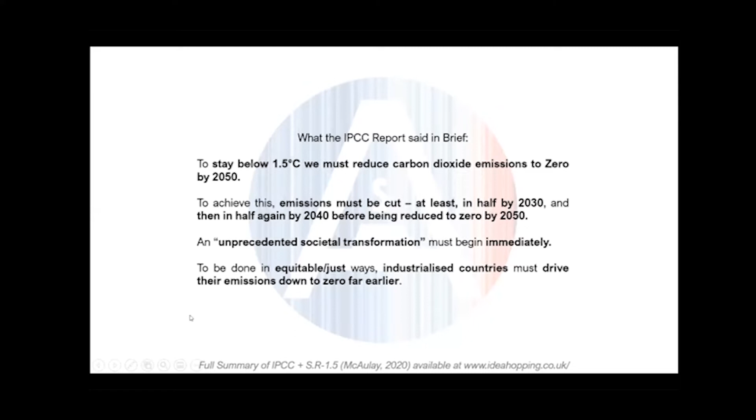This is the report that really jolted people into action 2 years ago, that '12 years to save the world' sort of rhetoric. To explain what it said: if we want to stay below 1.5 degrees above pre-industrial levels, carbon dioxide emissions have to hit zero by 2050. That's non-negotiable. Achieving this means emissions have to be cut in half in a decade, in half again the next decade, and zero by 2050. But to do this we need to really transform society. It's not just a slight tweak or bolt-on here and there, it's absolute transformation. And if this has to be done equitably and justly, industrialized countries must drive down their emissions far faster as well.

So what does this mean for buildings? The report was very clear about what that means for the construction industry and how buildings operate. For 1.5 degree pathways that keep us below that threshold, building emissions have to be reduced by 80 to 90% by 2050. That is huge. On top of that, we were told that by last year, all new construction needs to be fossil-free and near zero energy. And we need an increased rate of retrofit of at least 5% per year, year on year. This came from the Committee on Climate Change in the UK 2 years ago.

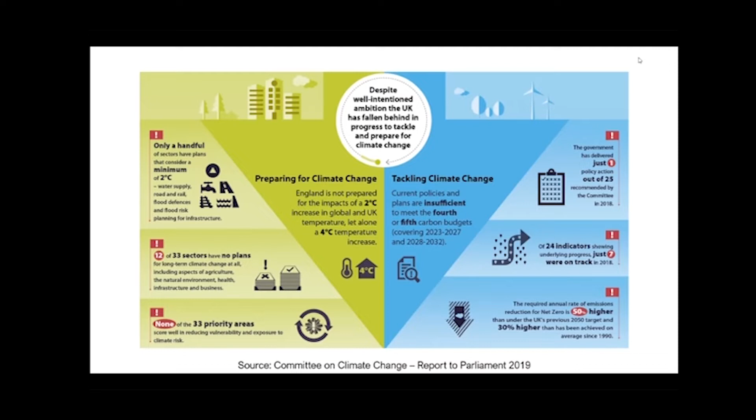This was a scorecard put together to show how things were progressing. 2 years ago, 12 out of 33 sectors in the UK had no plan for long-term climate change. We just had a report a few days ago saying the gap between the adaptation necessary and what is happening is actually widening. So we're further behind than we were 2 years ago at this point. The Committee on Climate Change was also very clear that we cannot meet the legally binding net zero by 2050 target if we don't nearly completely eliminate greenhouse gas emissions from UK buildings.

So the construction sector is incredibly important when it comes to responding to climate change, it has such a big impact. But in positive news, 2/3 of people surveyed said that climate change is a global emergency. In the UK, it's actually 81%. So we've got this huge increase of attention on the topic.

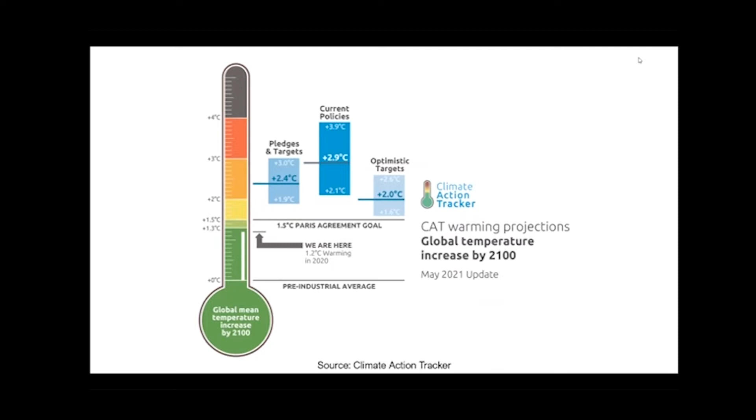Just to show whereabouts we are in relation to that 1.5 degree threshold, we are currently about 1.2 degrees. So we've got a really slim bit to play with. But it is possible within the laws of chemistry and physics. So it is possible to get there.

So you might wonder, as everyone does, how big a difference does that half a degree between 1.5 and 2 degrees actually make? Because on paper it doesn't sound like much, but in reality it's a huge exponential increase. If you look at extreme heat and how people are affected by that around the world, between 1.5 and 2 degrees it's over 2.5 times worse for people being affected by severe heat at least once every 5 years. And as far as sea level rise goes, that's another 6 centimeters from 1.5 to 2 degrees. So if you think of how many people in the world live in coastal areas, that has a huge impact upon life of all sorts as well.

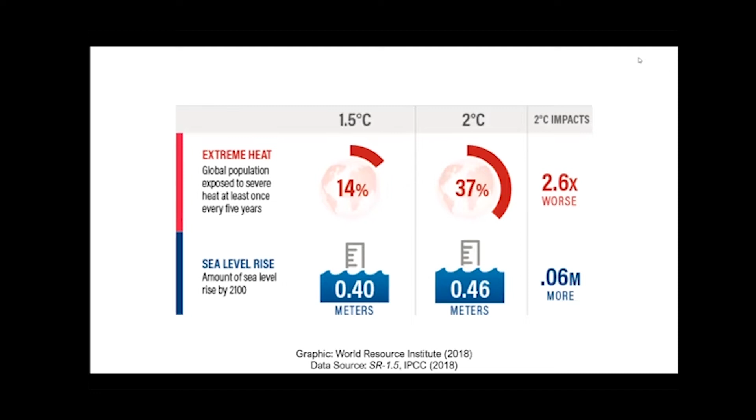But we recently had the Scotland's Climate Assembly. This is a really interesting thing that shows what the public think is necessary. This was the first ever Citizens' Assembly in Scotland, and their question was: how should Scotland tackle climate change, to tackle the climate emergency, in an effective and fair way? So all these things they're calling for, they've been given all the information, they've been given consultancy to learn about this, and they've responded.

So when you give the public the information, 97% of them say building quality must be improved. This is just a wee bit of market research that shows everybody wants this. 97% of people agree this is necessary. When it comes to passive house standards for new build, 97% of that assembly said it's necessary. 97% said planning should consider climate. As far as non-residential building, everything's increased. There's a huge demand for this.

And then when it comes to retrofitting homes, 94% of the Assembly said that Scotland should try to establish itself as a world leader in this practice. So there's a huge appetite and ambition in this part. One of the most amazing things that came out of this was the Assembly recommended the Scottish Government retrofit all existing homes by 2030. That is a radical, huge, ambitious thing. But in terms of creating work and stable green jobs, that could be revolutionary in itself. So that's just a little bit to show what's been coming out of that assembly.

And from around climate change, there's been lots of different narratives. There's ones like David Attenborough's, where it just says don't waste - as long as you don't waste things, things can be the same. But that actively overlooks the whole huge systemic changes that we really need to be seeing. We see it in cinema, we see it in documentaries - when things become very visual, they get a very strong response. Lots of people might have started to look at their plastic use after someone recommended they watch A Plastic Ocean or Blue Planet 2, because they offer a bit of a personal solution or a quick fix. They're quite good at stirring responses, but again, they don't look at the full wicked problem.

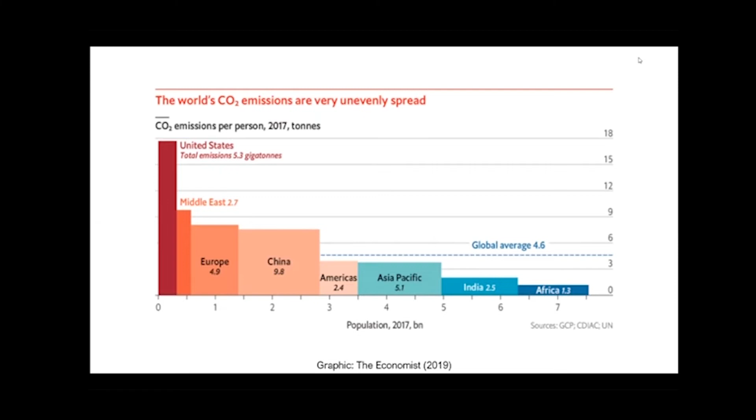And when you look at the world's CO2 emissions, they're very unevenly spread. In the UK, we emit a huge amount over the global average of 4.6 tonnes. In the United States, on the left-hand side of this graph, it's huge again on top of that. But actually, the UK is not as vulnerable to climate change in comparison to its neighbours. Also, the countries that have been doing the least emitting, typically in the global south, are far more vulnerable than we are. We're insulated at the moment due to our geography. But as you can see, even today, with the heat dome above Canada and America, they are already feeling the effects of this quite drastically as well.

Just to talk about greenwashing, to tie that line in and make that link - this is when a company makes a product, a service, or a building out to be more green than it actually is, usually without giving data to really explain this. Some examples might be claims about products or projects that aren't backed up. Other examples in the built environment are just throwing renewables at unsustainable design, because without addressing the fabric of a building, we're overlooking lots of the problems. Another is just throwing lots of technology at unsustainable design. So if we're starting from a point where our building regulations are not enough, simply throwing technology at buildings operating at the same performance isn't really going to fix the problem.

But quite a recent one, particularly in architectural spaces, is just throwing greenery quite literally at buildings or on top of them. This is the Bosco Verticale, which lots of people might think is the typical look of green architecture. In its context, it works, but it's not a universal fit.

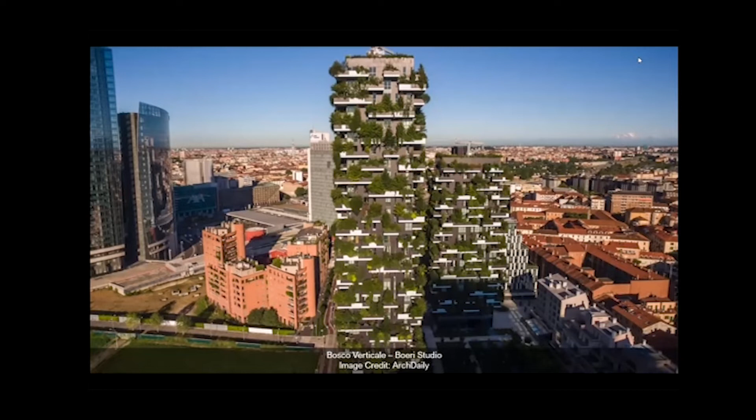And when you consider things like embodied carbon to put trees where they don't last their full lifespan, that raises questions as well. So now we're just going to do a really quick jump through the science, just enough to understand some of these reports that are coming out, because they are quite jargon heavy.

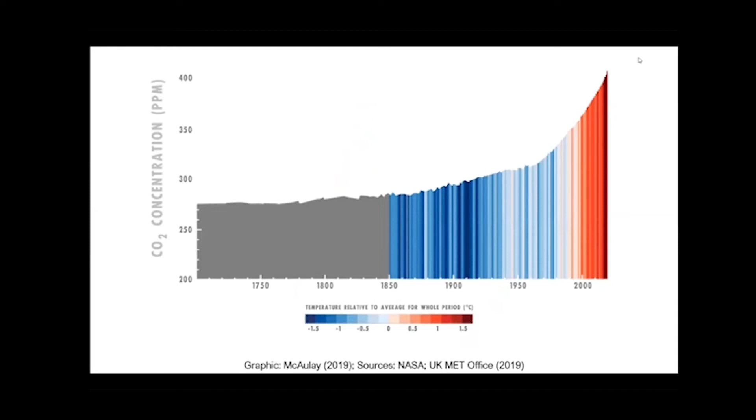You can see in this graphic here, on the left-hand side you've got the amount of carbon dioxide in the Earth's air, and in the colours you can see how much hotter the planet's actually getting. As we cross that 350 parts per million threshold of safety, as scientists call it, we've had a big spike in temperature, and that's been really consistent. Actually 2020 tied for the hottest year on record along with 2016.

So this is not the start of a new normal, this is the start of a rising baseline of how hot things can actually get.

We then have Earth Overshoot Day, where since the 1970s, we've been using more resources than our Earth can actually regenerate. At the moment, we use the equivalent of 1.6 Earths, and Earth Overshoot Day comes in about August or July. On that day, we surpass what the planet can sustain on an annual basis.

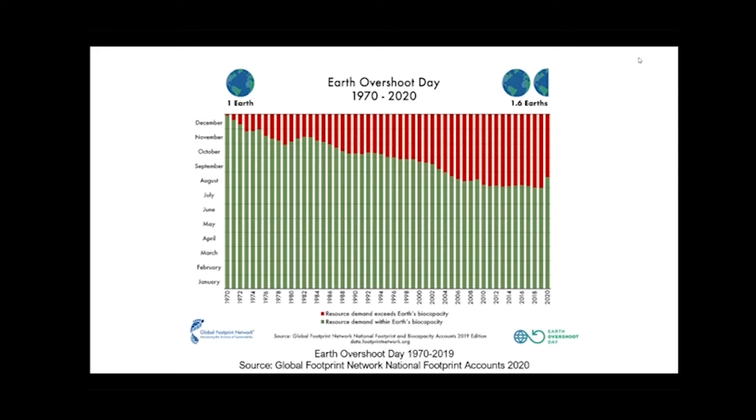And just to link all that in, there have been lots of planetary tipping points that have been identified, and these are starting to arrive quite far sooner than predicted. Things like the Greenland ice sheet were not predicted to start melting till 2100. That's starting now. So we've got things happening faster than previously expected.

So we're now going to pull it back to the built environment, because the built environment has a huge impact, but at the same time that impact could be an opportunity for doing climate good as well. So we'll go through some of this.

The operational energy in the built environment is 28% of global carbon emissions, which is absolutely huge. But on top of that, the embodied carbon of our built environment is another 11%. That's where you get that 40% figure from - the construction industry accounts for around 40% of all the carbon we emit globally, which is absolutely huge.

And there's never been a massive NGO campaign purely focused on the built environment. So we've had a bit of an oversight in that regard.

As far as embodied carbon goes, since that might be a new term for some of us, this is the carbon dioxide you emit during the extraction of material, the manufacture, transport, and construction of the building material, taking into account its lifespan from cradle - so from the ground to grave, as in back into the ground - or cradle to cradle, to be continuously recycled.

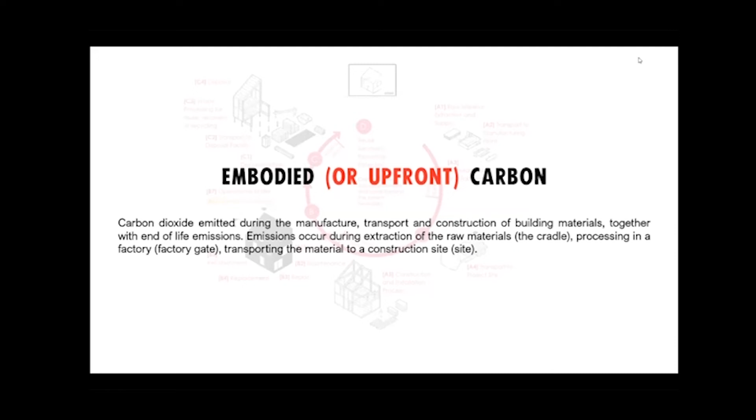But just to talk about that, at different points in the building's lifespan you get carbon being emitted - everything from the building itself to maintenance to transport. Because at the moment we currently say buildings that last 65 years have a long life, which in terms of responding to a climate emergency, we need to be building buildings that last, buildings that go beyond 100, 200 years at this point.

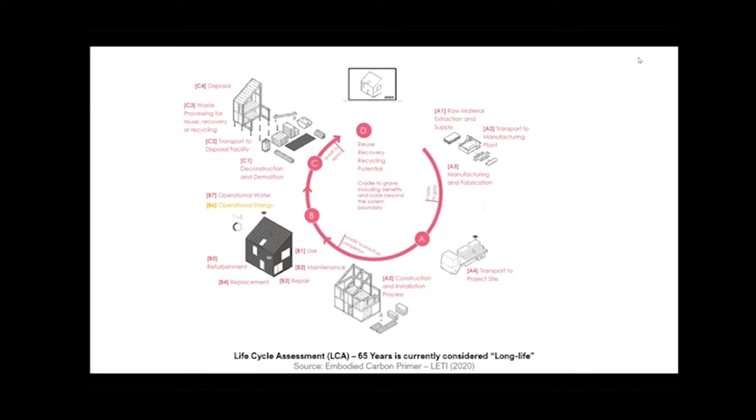Because cement production is responsible for 8 to 9% of global carbon emissions. This is a huge contributing factor, larger than several countries' total emissions.

And less than 3% of all the things we talk about around climate change mention the energy efficiency of buildings. So there's this 28% figure, which is a huge thing we can actually reduce and start working on.

But in the UK, a survey last year showed that 64% of the UK public had never heard of the concept of net zero before. So to lots of us that's a common, very familiar term, but when we're talking to the public and clients, this might not be something they've heard about. So this is a very useful thing to spot check and see how we're getting on at communicating that to the public.

Because buildings can actually be up to 250% worse than as designed. And this is a performance gap that we're starting to really try and dig into and eliminate, because it's a huge waste of energy and resources as well.

Retrofit is one of the key things in responding to the climate emergency through the built environment. 80% of the buildings we'll be using in 2050 are already standing right now, and you can save 55 to 75% of the associated embodied carbon by retrofitting a building instead of wiping it out and starting afresh.

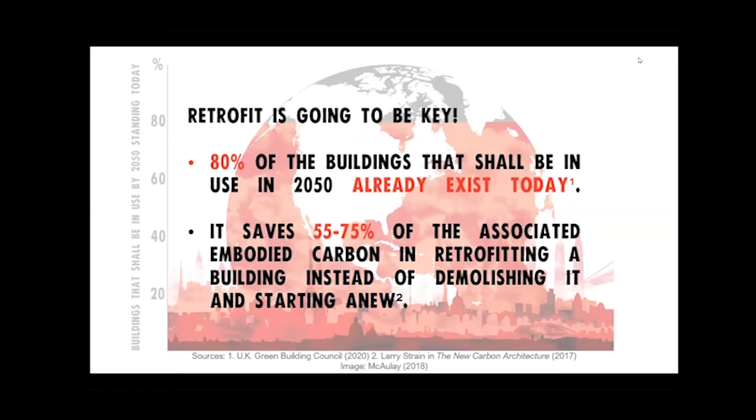From the Scaling Up Retrofit report, we were told quite bluntly that if the UK wants to meet its Paris climate commitments, it must be retrofitting 1,000 homes every single day. At the moment, that's not quite happening. But again, that's huge potential for generating work, generating stable green jobs, and driving down carbon emissions at the same time.

On top of that, 40% of any nation's healthcare costs actually come from its built environment. This relates to things like asthma, fuel poverty, respiratory conditions, and other things. So healthy and sustainable buildings are actually a public health strategy. It's not just about climate, it's also about our health and well-being.

So what can we actually do in that space? We're actually very lucky, lots of things already exist. We already have things like CEDA's Sustainable Renovation Guide, which teaches us about improving homes for energy, health, and the environment. And there's guidance from Historic Environment Scotland on working with traditional buildings. So we can use them straight out the box. They already exist, and it's fantastic.

But we also have definitions of what net zero operational carbon actually is. How does it work? This is about looking at low energy use, the measurement and verification of buildings, reducing construction impacts, low carbon energy, and then looking at that zero carbon balance. This is something we can bring into all of the work that we do.

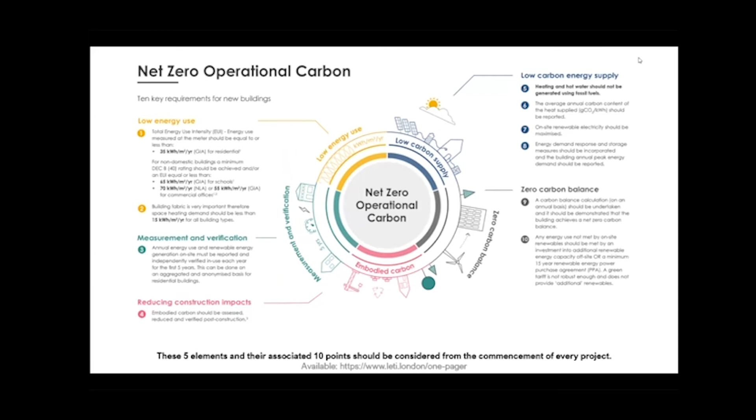So just some quick things to remember: prioritize the adaptation, retrofit, and reuse of buildings over building new ones. Everything we work on is an intervention into an existing ecosystem - something was there before people built houses there. Statistics say 90% of a building's environmental impact comes from the very earliest design decisions - where that building is, where windows go, orientation, etc. So always strive for solutions over demolition.

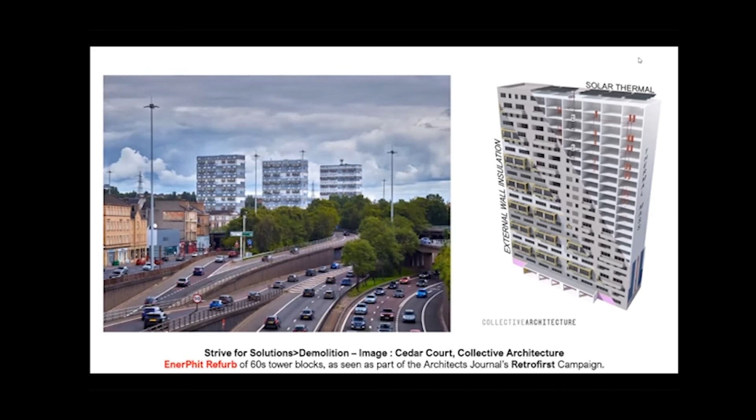A really fantastic example by Collective Architecture is an EnerPhit refurb of a 60s tower block. It was a really incredible way of taking buildings that the residents actually loved quite dearly and making them as efficient as physically possible.

Conservation is also incredibly important - the traditional buildings we have to work with, because lots of these traditional building skills are actually lower carbon than modern equivalents, and they're quite sustainable. Things like limecrete, lime plastering, clay plastering, etc. This is an example of a conservation project, what is now the Centre for Conservation training in Scotland - the Engine Shed from Historic Environment Scotland.

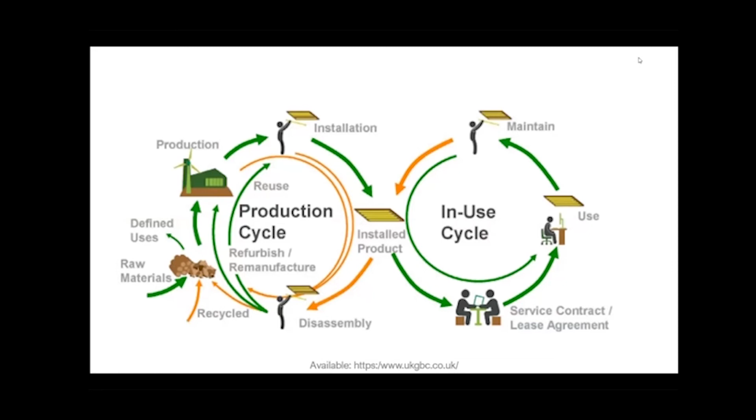If reuse is not an option, we need to design for circularity - to keep materials and components in circulation, to reuse them. In Northwest Europe, only 1% of building materials or elements are reused following their first use, when realistically they should be able to go on and on. So the whole circular economy is not just a buzzword, it's about keeping materials in flows and cycles - looking at an installed product in terms of leases, maintaining it, and with disassembly, reuse beyond just the installation.

A good example of this is the Bute Recycling Centre, also by Collective Architecture, which used many reclaimed and recycled materials.

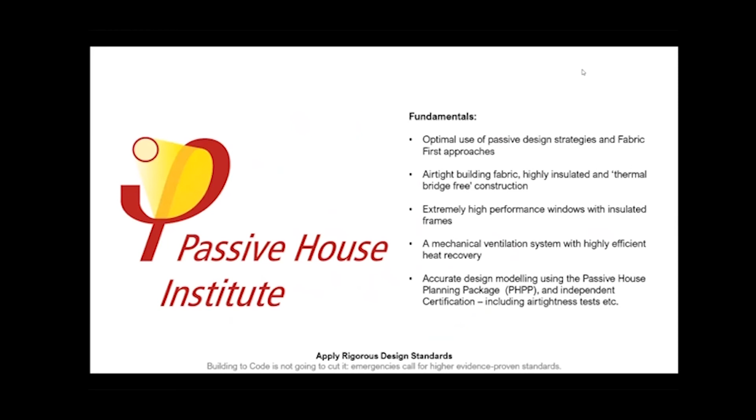On top of that, we need to be increasing the standards we're using. Building to code or the barest legal minimum is not really fit for an emergency - we need to go beyond the minimum bar. Passive House is a really good way to start doing this, a really thorough method. The fundamentals of Passive House are optimal use of passive design strategies, an airtight building fabric with continuous insulation and thermal bridge-free construction, really high performance components, MVHR systems, and modeled and verified design - going well beyond the bare minimum.

Typically in a UK context, passive houses achieve a 75% reduction in space heating requirements as opposed to standard buildings. That's a huge improvement in reducing fuel costs and building better buildings.

An example you might be quite familiar with is Goldsmith Street by Mikhail Riches - it actually won the RIBA Stirling Prize.

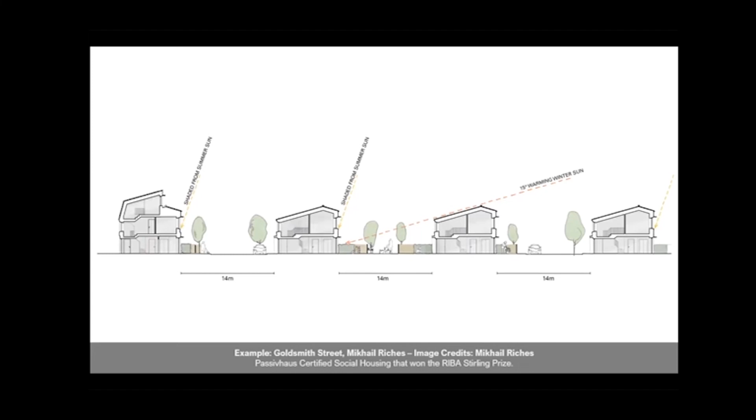So for the first time, a social housing and passive house project won that prize, which really changed the game in that regard. It's been designed fabric first to try and drive down fuel cost as much as possible, and have a really lovely place to live as well.

But this does bring in more complexity. For building details, the amount of insulation that you can see here in red has been beefed up quite substantially as well. So what does that mean on site for a passive house?

Really, it means there's a far greater emphasis on build quality above all else and attention to detail - how airtight buildings are, the continuity of insulation wrapping with no gaps, greater collaboration and more open communication channels, how you sequence the build, and thermal breaks in particular.

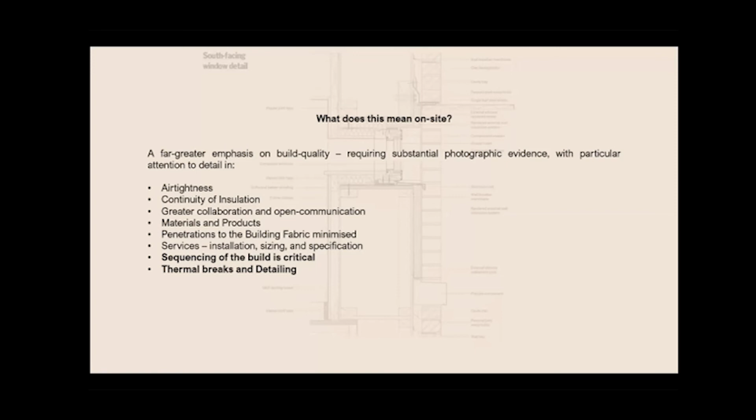In Scotland, passive house buildings are starting to get more common. We can now start to find any of these through the Passive House Trust website if you want to go and look. Other examples include Lilac in Leeds from White Design.

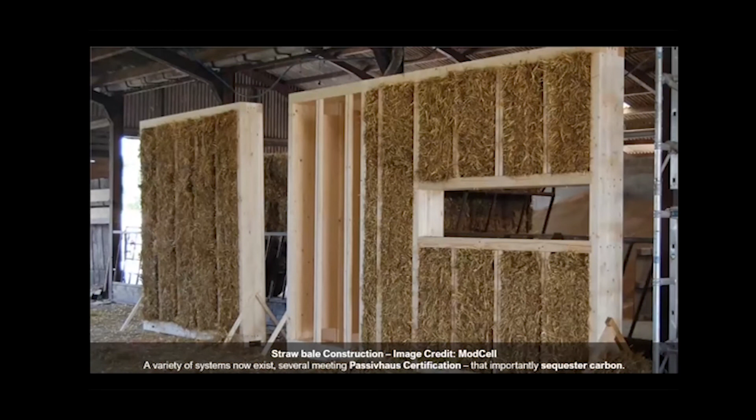This is a low impact co-housing scheme that was actually prefabricated using a straw bale panel system. You can't really tell from here, but this is what that looks like. Lots of these systems are actually passive house certified, meaning they can meet passive house standards straight away. But really importantly, they sequester a huge amount of carbon dioxide.

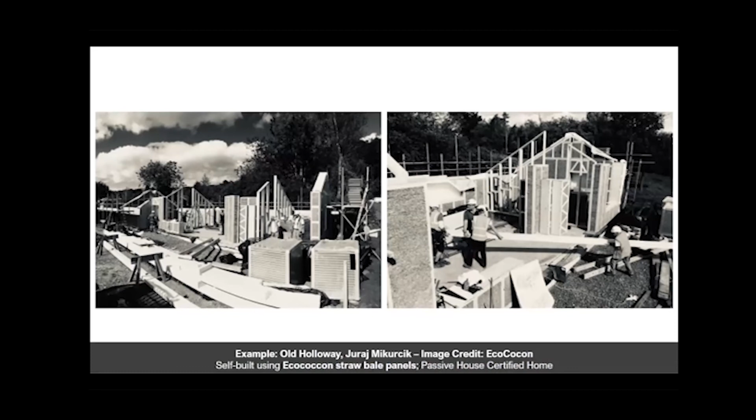Another example is a lovely house at Old Holloway by Juraj Mikurcik, who's from Architype. This is a self-built home, proving you can build to passive house standards with self-builders as well. It's a really lovely project where you can see these panels came in as different components and slotted together like Lego blocks, which made for a very quick and succinct build.

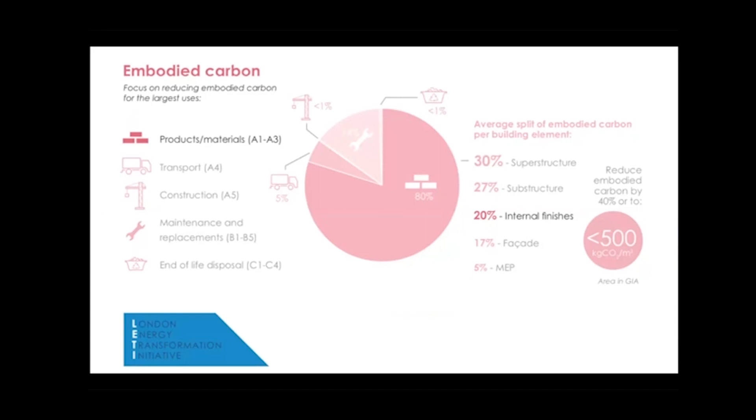But on the embodied carbon front, we do need to note that internal finishes are very important - even how we paint, plaster, and build up from plasterboard. Alternatives to gypsum are things like clay, because clay can be lower impact and healthier, and it can also give you a bit of moisture buffering and some thermal mass on top as well.

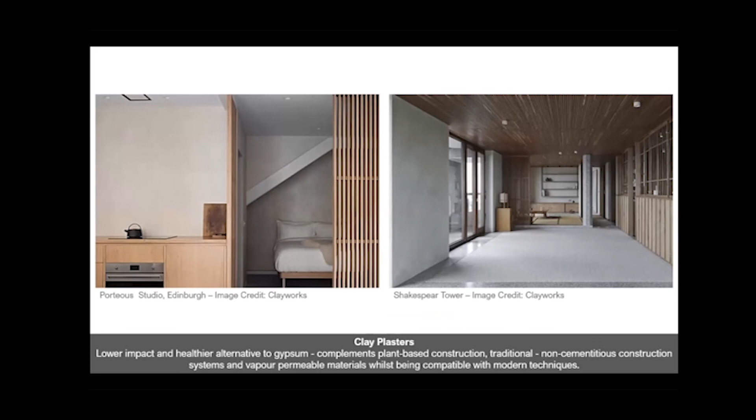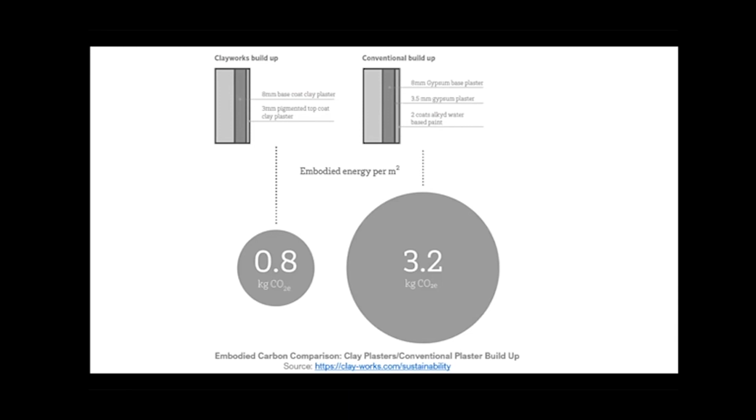So it's very adaptable to lots of systems. Just to put that in context, some research was carried out which showed that a clay plastered wall gives you about 0.8 kilograms of carbon per square meter, but with gypsum it's 3.2. That's a huge difference across a whole housing development as well.

We then move into things like cross-laminated timbers becoming more normal. This is a kind of jumbo plywood - assemblies of planks that are cross-laminated in perpendicular layers and can form structural components that lock in a huge amount of carbon dioxide.

This brings us into examples in Scotland, like Plummerswood by Gaia Architects, which uses a mass timber system called Brettstapel that actually sequestered 200 tons of CO2 in this one building, which is quite incredible, even though that happened over a decade ago.

And then we have more recent and more region-specific examples. IndiNature are doing their carbon negative building products using hemp and natural fibers. These are lots of different systems that combine to make their proprietary ones. These are really good places to start, bringing in materials that are local to Scotland.

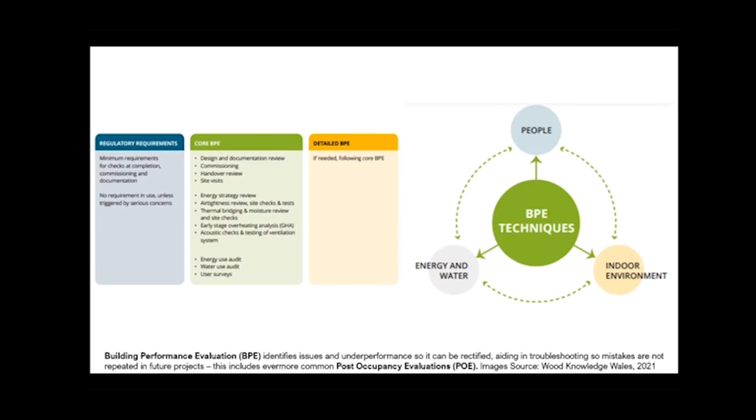And also we can learn from what we build, doing post-occupancy evaluation to learn from buildings, to improve upon things and to identify problems. This is about looking at how the building works with people, energy and water, and also the internal environments. This allows us to identify problems through monitoring, and means the next thing we build can be improved as well. So it's about learning and improving, making that feedback loop a bit stronger.

So just to end as succinctly as possible, everything that's not blue on this graph is something that your work in the construction sector can reduce the impact of and turn into an environmental positive. So working in construction is actually a fantastic opportunity to take climate action that can improve people's lives and improve public health as well.